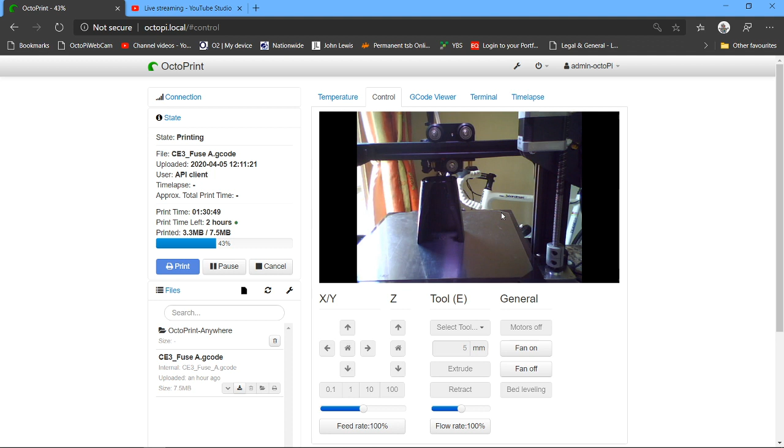Right guys, we're live again. So this is the Fuselage section on the 3DLabs RazorBlade.

Just in case you didn't pick up on previous videos, 3DLabs are a bunch of guys who work on 3D printing, and they create a number of different air model planes. They also do boats and all sorts of other stuff. Although some of these are available for purchase, we're starting to see some decent 3D printable objects on Thingiverse as well, so you don't necessarily have to pay for them.

With aviation though, it seems tricky printing out model planes, because these guys spend a lot of time getting the internal structure, the weight and strength all sorted out. So I've bought a number of these, $20 or with a bit of discount some months, $16 or so, but they're really good, so I'd take a look at them.

But if you're a big Thingiverse fan, and I quite like Thingiverse, my son sends me some stuff from time to time to print out. There's some really good designs, like a jet boat or something like that. There's some pretty neat designs up here, and there's a couple I'm probably going to have a go at.

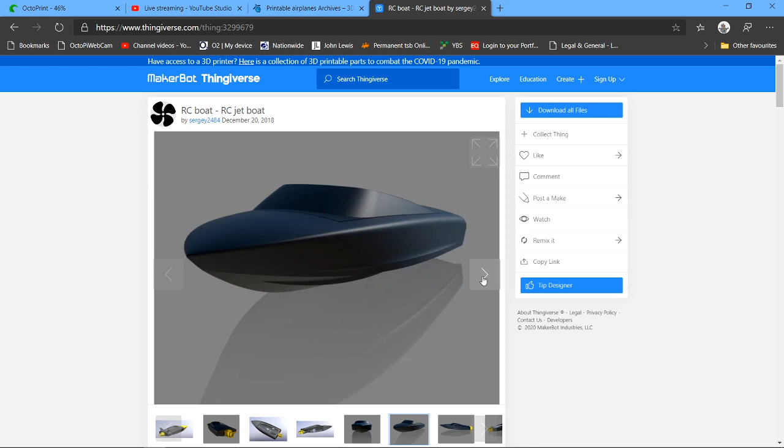So it's drawing water in underneath - it's got a decent hull. It's drawing water underneath and just running it through effectively a tube, which is what a jet boat's all about, right? If you've ever been on a jet boat in New Zealand through the rapids, it's quite an experience, the speeds they go.

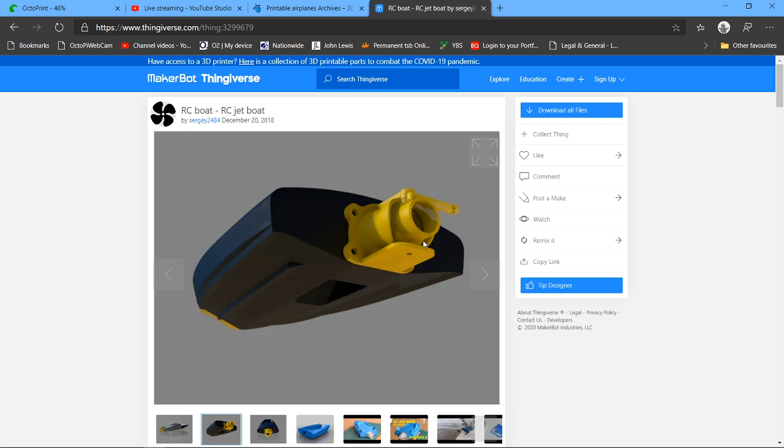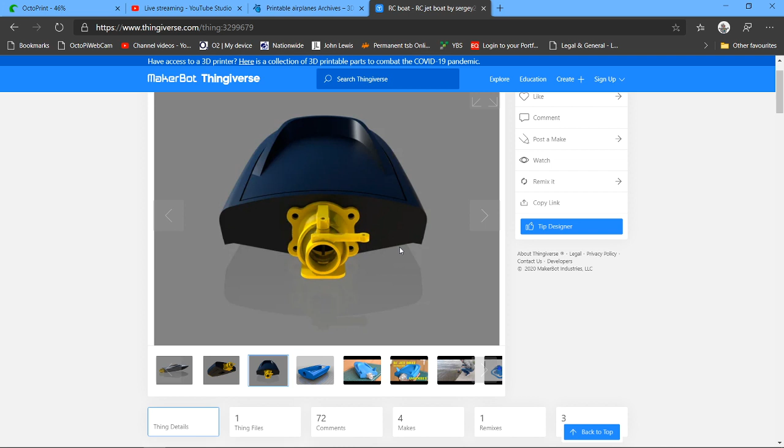Obviously these guys have been doing it for years, and the distance away from the river banks, the stones, the rocks - you wouldn't think these boats can go over such thin water, but they can, because they've virtually got no... they're ramming air underneath, and they're really only using this little tail section here where they're skimming over the water. So there's not much hull immersed in the water when they're running at speed. What they can do with these things is pretty remarkable.

Yeah, there's a couple of videos up there, have a look at them. So yeah, you can either buy stuff or you can get free stuff. I would check the comments on a lot of these. This is a good one - I've seen the video on it, but especially the aircraft related stuff...

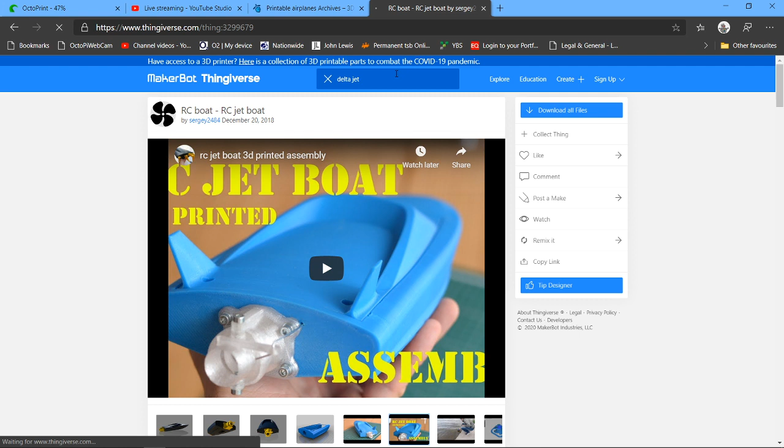So if I search 'Delta Jet' or something like that, I don't know, let's see what we come up with. Some of them may not print out correctly. Let's have a look at model or RC plane - see what's up here. Oh, RC, not RD. RC plane. Yeah, there's a few up here. I've had a look at some of these.

The wing sections aren't really that clever - they're not, because it takes quite a bit of effort to get the wing sections designed right. That looks not too bad, I think I've had a look at this one already. There's not a huge amount up here. That looks pretty reasonable, in fact that looks quite a good one - looks like it's got a decent wing section on it.

So you might want to have a look around. Yeah, this looks actually pretty good - it may have retracts on this one as well, I don't know. Yeah, that looks pretty neat. So there is some stuff starting to come up here which is getting pretty good. That's a nice looking plane - yeah, do like the look of that.

Printable undercarriage as well. Have a look around Thingiverse - there's other websites as well, but Thingiverse seems to be the main one people go to. Within Cura, there's a Thingiverse add-in too, so you can browse objects within Cura and just download them.

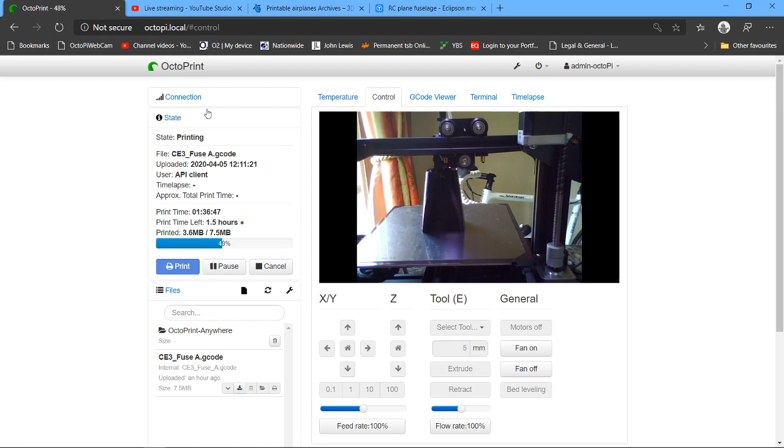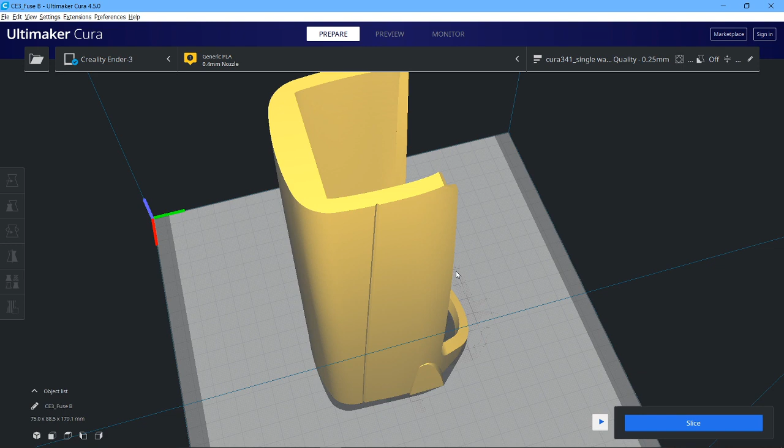So the fuselage is coming up. Next piece I'm going to print is Control O, the second section of the fuselage, so we're on to B. Now because this is pretty much the bit that's going to take the hammering on landing - the nose won't so much, unless you're going to face plant it - this bit I need to figure out if I'm going to go for one wall or two wall.

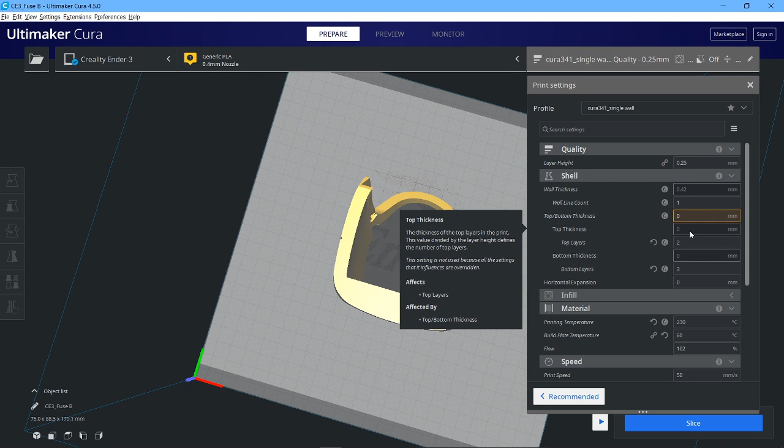I think on my original one I went for one wall, but because this is probably going to be flown by my son, I reckon I'm going to leave two top layers, three - let's have a look - bottom layers. Yeah, I'm going to go for three bottom layers, two top layers. But I'm going to have a look at what a wall thickness of two looks like.

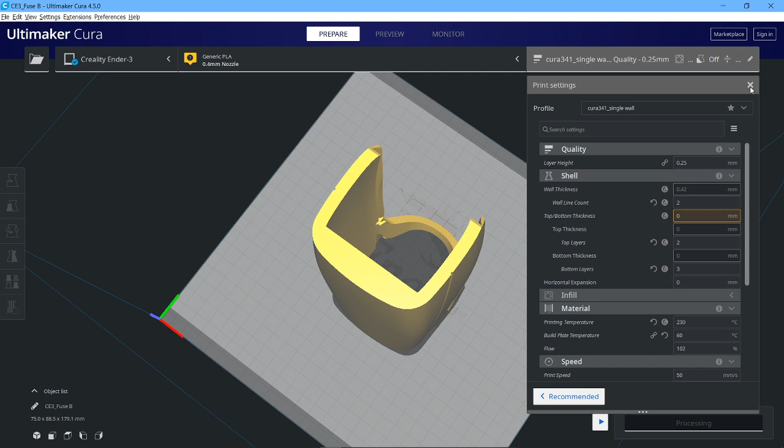So I'm going to beef it up a little bit. Some sections of the fuselage I typically leave as one because I've already got internal structure which gives it rigidity, and other sections I tend to beef up. Obviously this will increase the print volume, the amount of material it's going to consume, as well as take additional time. But it's worth investing 7 hours - that is with two walls. That's quite a lot. Let's have a look at it in preview then.

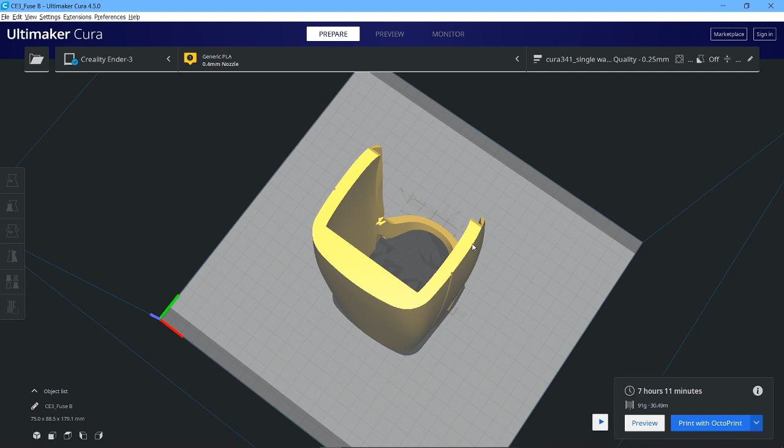But this is a fairly heavy part of the fuselage, so let's just wait for that to finish slicing. Okay, so let's come down. Yeah, you can see I've got my two wall thickness now rather than one wall thickness.

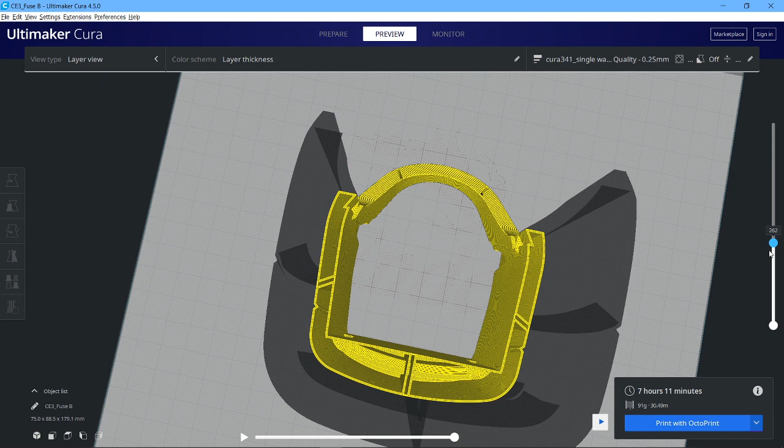There is a floor in here, look - so this is where it's getting additional rigidity from. And it's a box with a couple of supports. If I come all the way down, yeah, there is - if I just look into it - a decent amount of support built in.

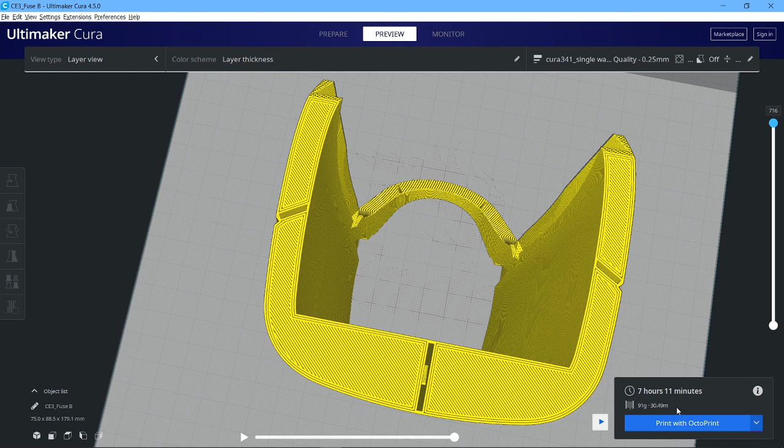So, 91 grams and 30.49 meters of material. Let's bring that down to a one wall count. I'll slice it - just to see the time difference in the amount of material it's going to consume.

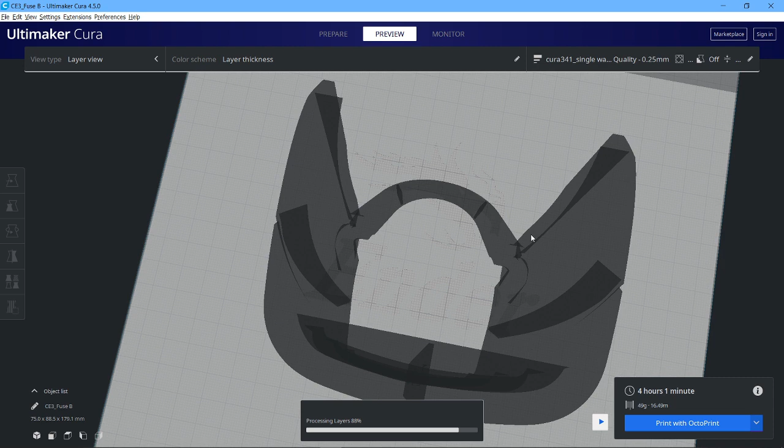So of course the heavier it is, the harder it is you've got to throw it, because the more weight you put into the model, the more chance it has of stalling. Yeah, that's a huge difference - 4 hours 1 minute, compared to double that really. So that's with one wall thickness. I think I'm going to stick with one wall because I did in the first one. It's just too heavy.

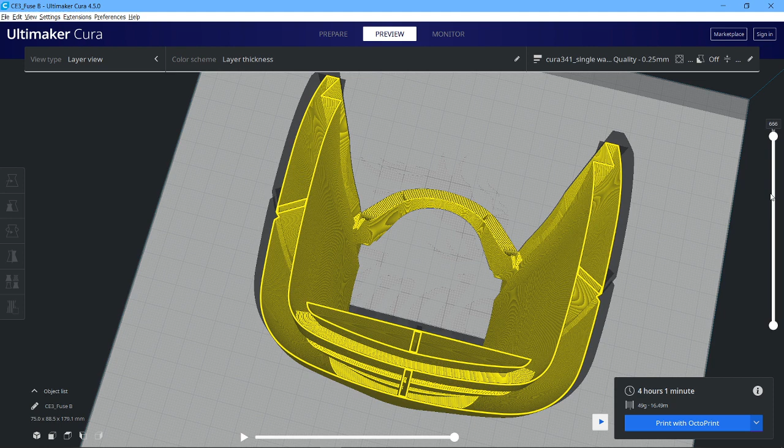Too heavy on material in terms of time more than anything. So I think I'll stick with a one wall thickness because it has got these additional trusses underneath giving it additional support. Let's just rotate that around a little bit. You can see the kind of material layers that have been added in to give it sufficient strength, because it's going to take impact on landing.

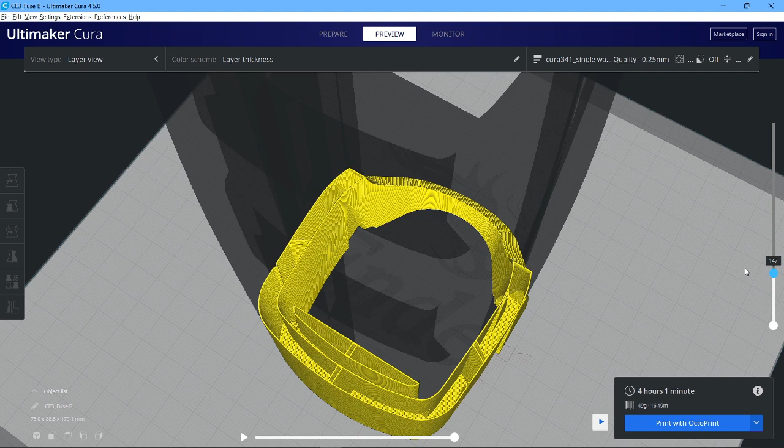Yeah, so I'm quite happy they designed this pretty well. You can see the way they've designed it with a little bit here - look, it's like a truss or a support rib. Another one there as well. Look, it's built one in here in the floor and the layer, and then that truss here is coming into contact here. So yeah, it looks to me like it's all right with a single wall thickness.

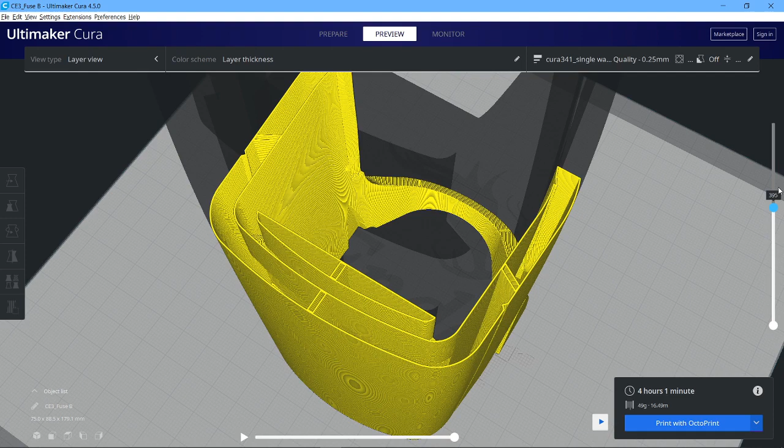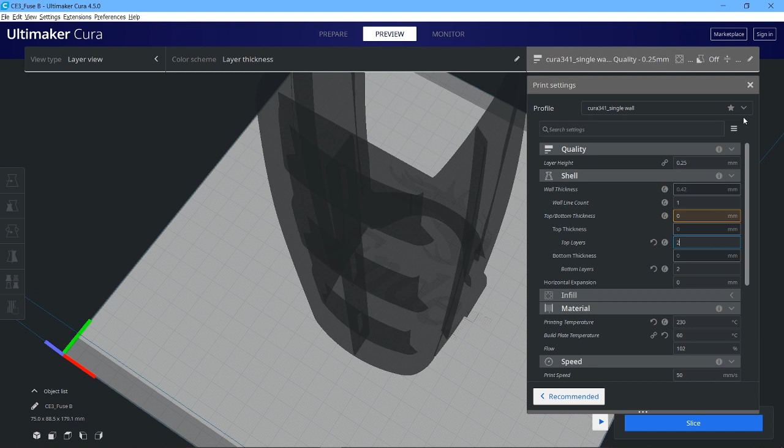It's been designed properly, and providing you give it a couple of top layers and a couple of bottom layers - in fact I'll probably get away with 2 bottom layers and 2 top layers, which should be adequate to provide a decent bond with the nose section, and then the next stage bond with the following C section. Yeah, we'll see how that goes. I think that's where I'm going to give it a go.

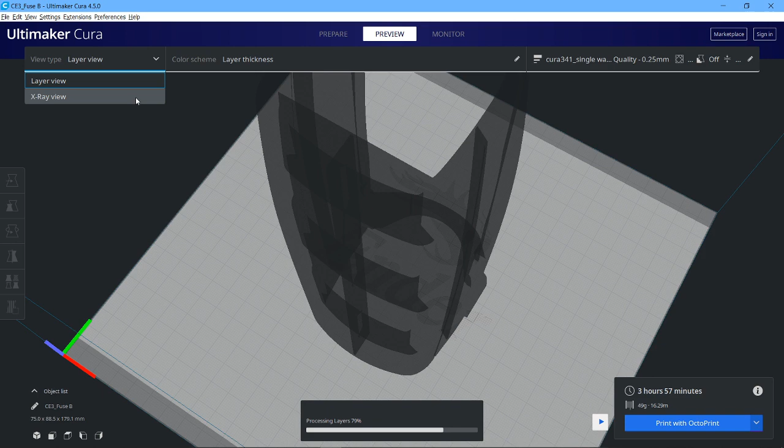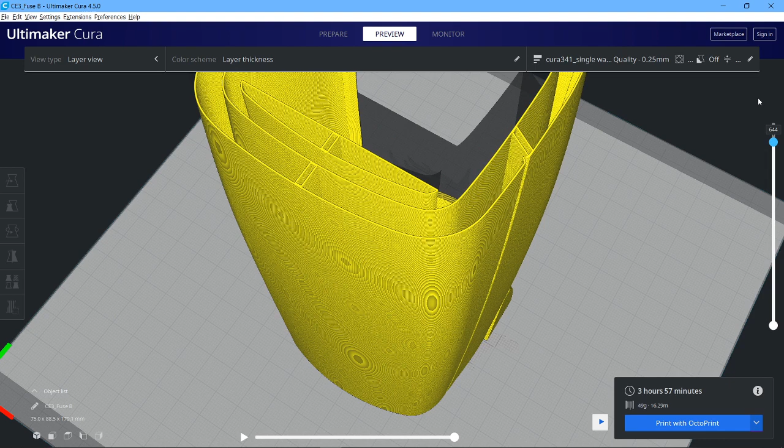Here again you can see the additional sections in here. I may have mentioned you can choose X-ray view, which is quite a nice feature, so you can see these sections a little bit more clearly. Yeah, so I'm going to give that a go - just zoom in there and check those layers again. That's 3 hours 57 minutes with 2 layers. Yeah, so that's sufficiently light and sufficiently strong.